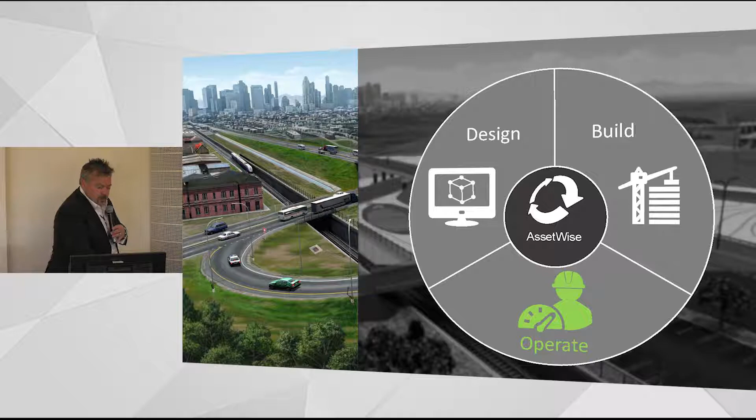Now, of course, there's not many brand new roads that go from nowhere to nowhere. They're always connected to an existing asset. So I'm going to start in an operational environment. You might have an existing database of your road network that you're managing in the CDE. And we have applications that allow you to manage change across that network, to improve the reliability of that network.

And as you saw, we've got analytics tools that allow you to look at the different performance characteristics. And in future, as we move further into a big data world, look at information from things like sensors built into the infrastructure to be able to make improved decisions.

What does that look like? Well, this is a linear reference model network of a set of roadways, and we are basically looking at a project where we're going to upgrade this road between two existing ones on our map there.

We can create the road within this network model. We can assign various bits of metadata to that road. We can say what it's called, what class of road it is, perhaps which direction it's moving in, the class and types of vehicles that might use it. But we can also use that to reference inspection records against.

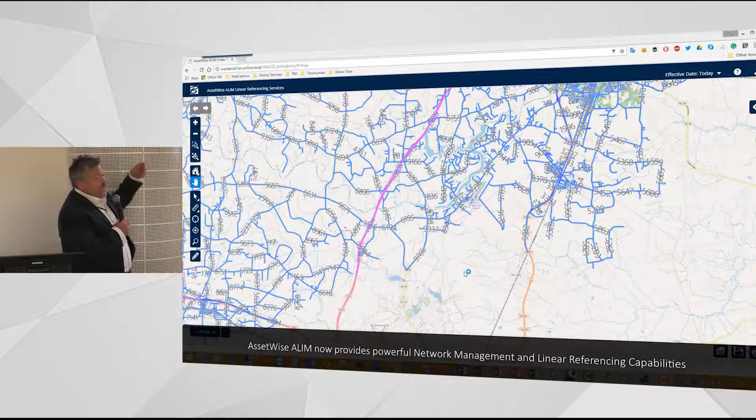And you can do things like change the different layers that you're looking at. You can measure it. You can interrogate that 3D model and look at it in relation to a set of maintenance plans, for example, within the AssetWise solution. So that's just context capture. And a reality mesh is a 3D model built from photographs.

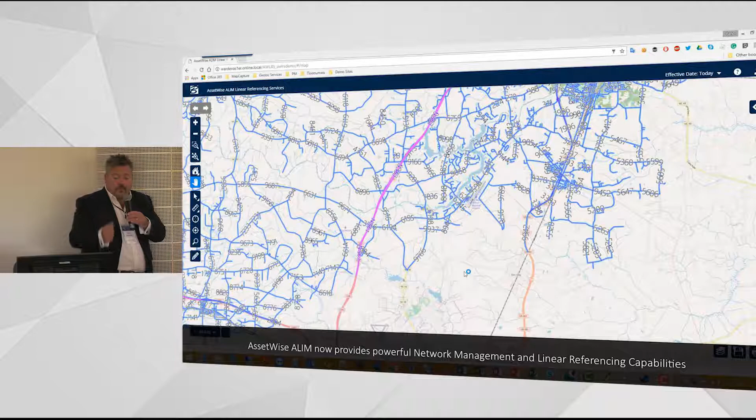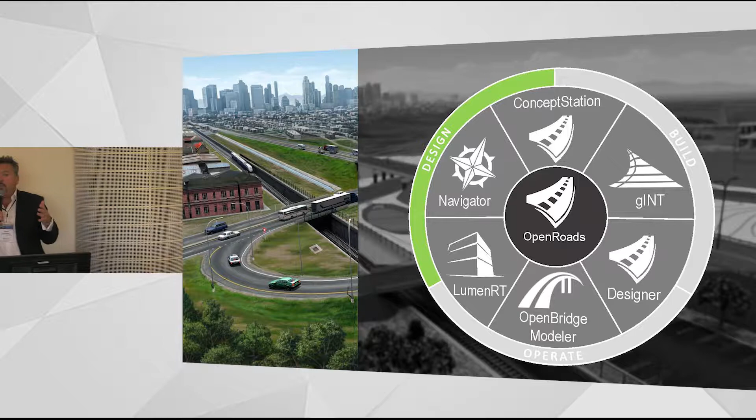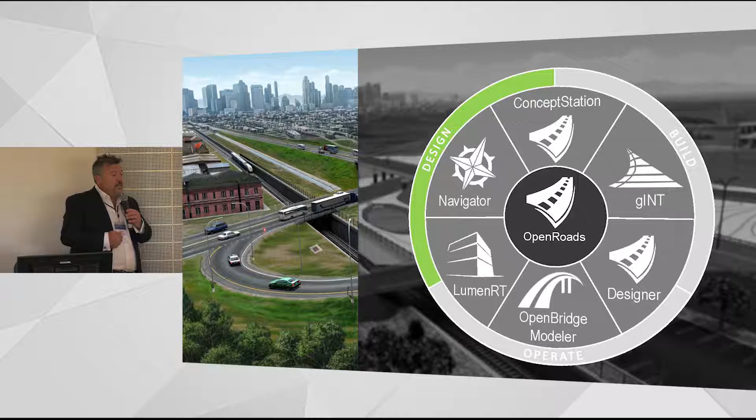I'm going to move into design now. Open Roads is a set of products ranging from conceptual design with Concept Station, to gINT which looks at geotechnical and subsurface information. Our most recent acquisitions, which Stefan mentioned, include Synchro, and we've just bought two companies called Soil Vision and Plaxis, which strengthen our subsurface engineering capability in support of the design work above the surface. Designer looks at detailed design of roadways and bridge modelling, and LumenRT handles visualization. I'll show you all of these in a little detail.

First we'll look at a reality model with the contextual information of the scheme we're working on. Here you can navigate throughout that model in Concept Station, and actually extract the part of the model you want to work with. You may have flown a 15-kilometre square area of land, but the corridor you're interested in is much shorter and smaller, so you can extract that and use it as the basis of your design work very easily.

When working at a conceptual stage, you want to sketch out different designs and ideas, and Concept Station allows you to do that. You'll see the ability to create new roadways, maybe link existing roads to your design. In this case, we're changing an earthworks section along that roadway into a bridge, shown in both 2D and 3D. By striking the line across and rotating the view, you can see we've created a bridge there, and that information carries onward into the detailed design phase, so all the work done at that conceptual stage isn't wasted—it's time well spent and can be reused.

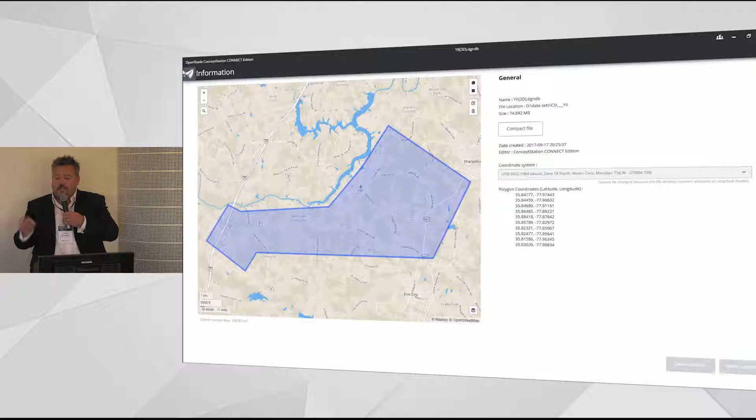I mentioned the ability to link roads, but we can also quickly and dynamically design things like roundabouts inside Concept Station. I'm hoping to give you a feel for how interactive and dynamic Concept Station is, and how it speeds up the process. At any point you can click a button to understand the financial implications of the decisions you're making, and get costings and quantities from the project. I'll show you more of that when we get to rail.

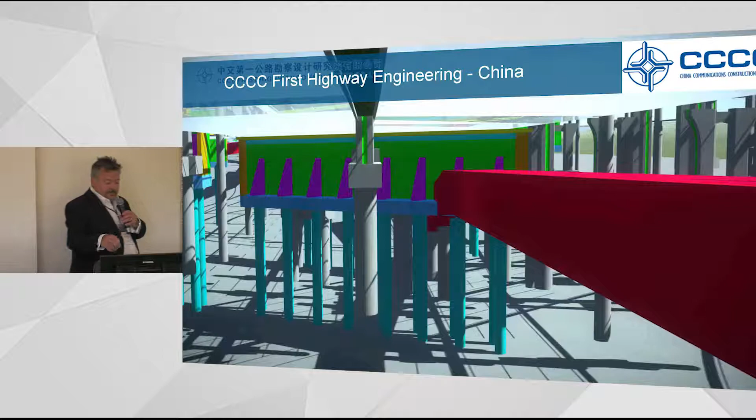Moving to China, this is an organization called CCCC First Highway. They had a huge project in one of the southern provinces of China, with a lot of subsurface engineering to model—over 3,500 underground utilities, 8 major interchanges—and just 9 months to do it. They used Concept Station to achieve that. I wanted to show this video because it demonstrates our subsurface clash detection capability. In red, you saw a duct running and interacting with, or breaking through, the underground infrastructure, and they were able to use Navigator to resolve those clashes at the design stage instead of out on site, reducing rework and optimizing both the information and quality of the product they're delivering.

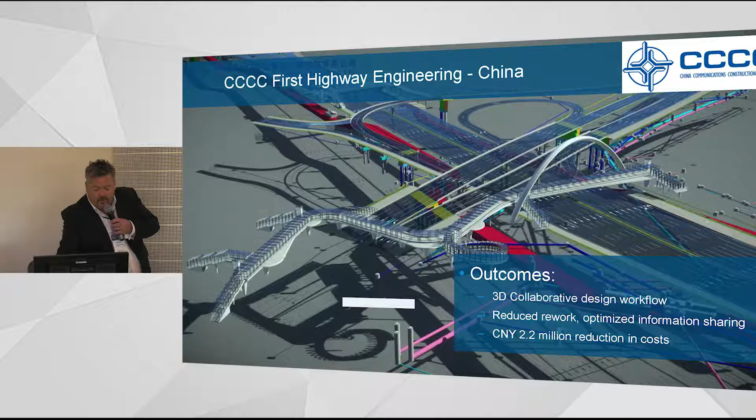Let's move into visualization. I mentioned LumenRT, which came from the movie business and has been involved in Hollywood movies over the last few years, including Avatar. But it puts this in an engineering context, allowing you to take your conceptual design models and create really lifelike visualizations and simulations—including the ability to link to products like Vissim, bringing real traffic models into your road environment, and onward into VR, whether using Google Cardboard or higher-end, higher-quality headsets like Oculus Rift and other quality brands of VR headgear available.

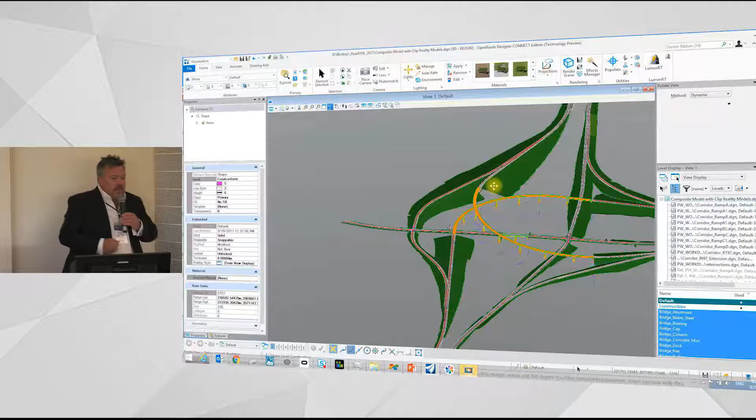And there you see working in a VR environment, jumping and transporting, as they call it, to different parts of that model or simulation.

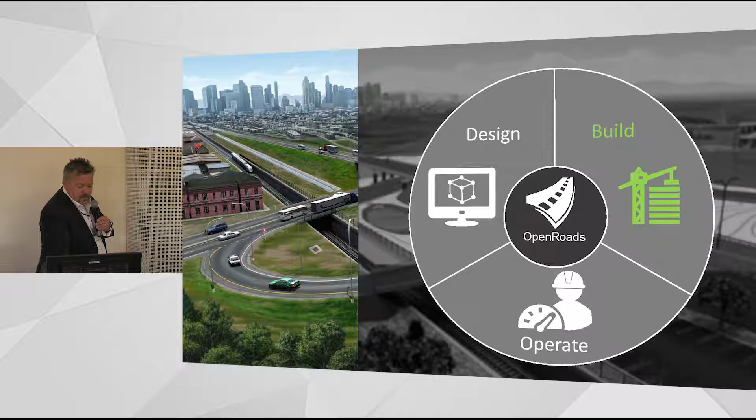I'm going to skip through this video and move onwards into construction, because all of that information can then be taken from design through detail into construction, and we can look at automating that process.

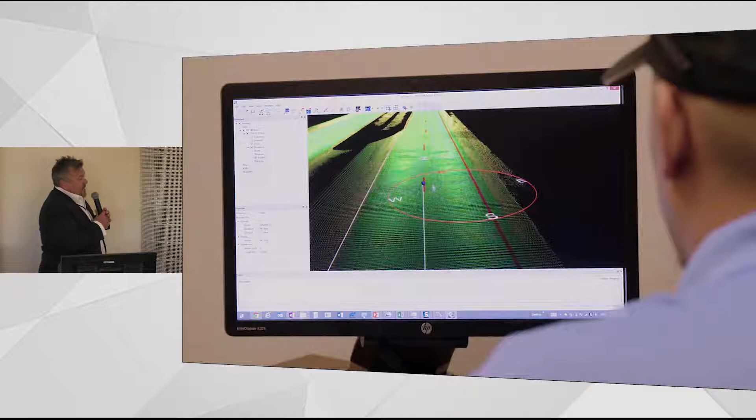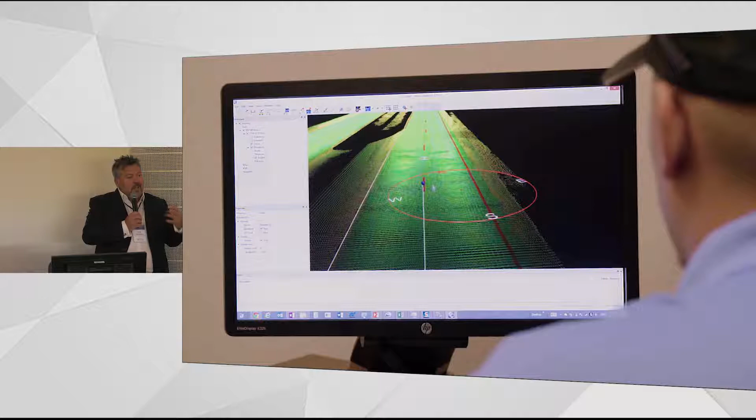We're working with Topcon to optimize that for those working within the industry. You heard Stefan use the word constructioneering. What that really means is we can take that 3D model and digitize that workflow so that we're handing it to the machinery, and it's using it not just for grading and earthworks, but also, as you see here on screen, actually laying the asphalt for the road. It's controlling the level of the blades left and right to ensure the right quantities of material are laid as per the design, optimizing the cost of the material you're using.

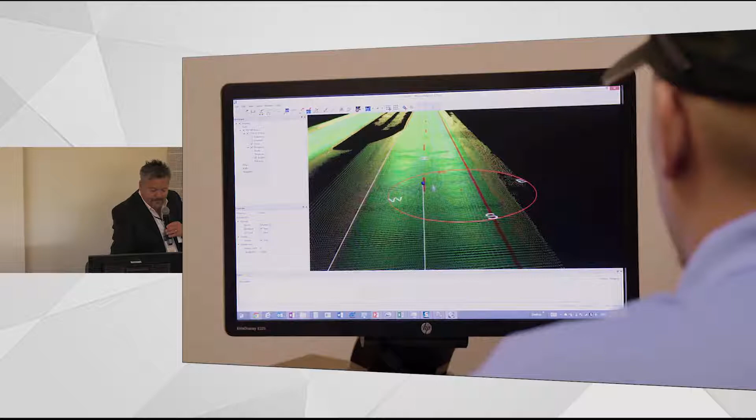And of course you can then survey that road as you go and compare the as-built directly to the as-designed, and see where the discrepancies are and whether they're acceptable. So just another way that we're digitizing those workflows.

Once it's built, the longest part of your asset's life begins - the operational life of your asset begins. And that should never be forgotten.

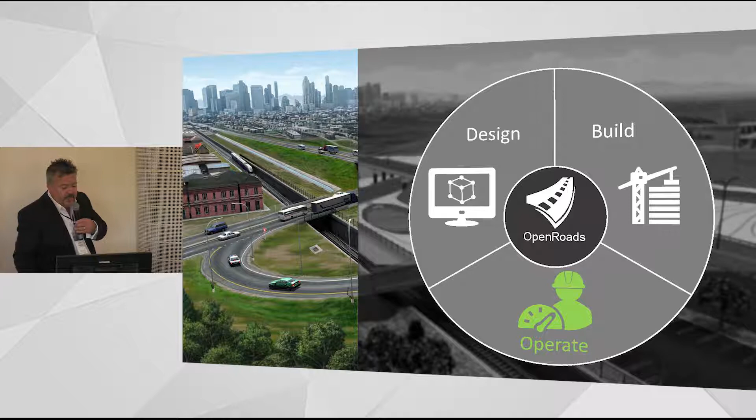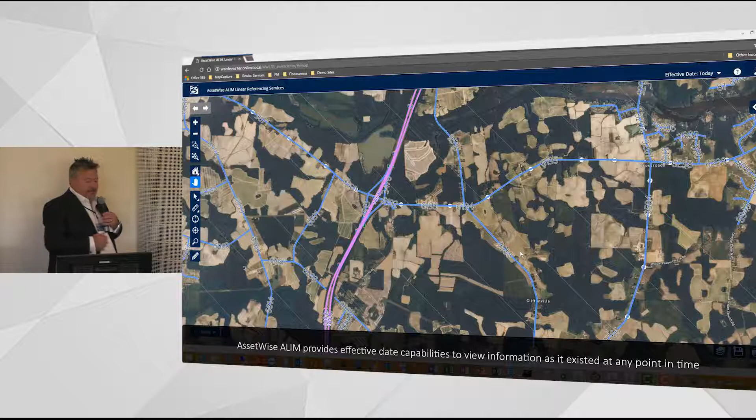But what I wanted to do was go back to where we started and look at how your new design can then be incorporated and go full circle back into your operational database, into your connected data environment for this road network.

At this point in time, we're going to bring that new design and make it the current model. You can see that we can update the network model for that particular piece of infrastructure - that intersection right there in the middle of the screen.

So OpenRoads and AssetWise leverage information that sits within your connected data environment, using those components, context, and workflows that I spoke of. What does that enable you to do?

Well, actually, it allows you to link every one of the disciplines, all of the data they're using, and all of the different applications - be they Bentley applications, or as we saw on screen, other applications that might exist throughout your organization or the project. Bring those together to streamline project delivery, enable digital construction, and increase asset performance at the end of the day - drive more value out of the assets you're designing, building, and operating.

And I mentioned OpenRoads and AssetWise are the two brands and sets of products used in that operational environment.

So I think I'll take questions on both road and rail at the end, but in order to keep to my time schedule, I'm going to move straight on into rail and give you a similar presentation. And then if you've got some really hard questions, Stefan is still here to answer those, or I'll give them a go myself.

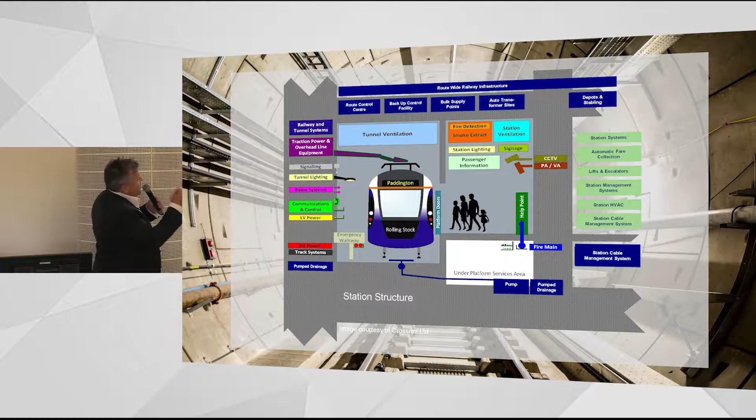And in fact, if you just take this slice through - this is a station of Crossrail, a new rail link being built across, or under in fact, London presently - you can see the number of different types of engineers and disciplines involved, not only in designing and building that asset, but when it becomes operational, maintaining that asset safely and reliably, whilst you've got members of the public roaming all over your railway station, or through your buildings, or across your roadways.

Hugely complex, and when you're working in a tunnel like this, in a very tight and confined area.

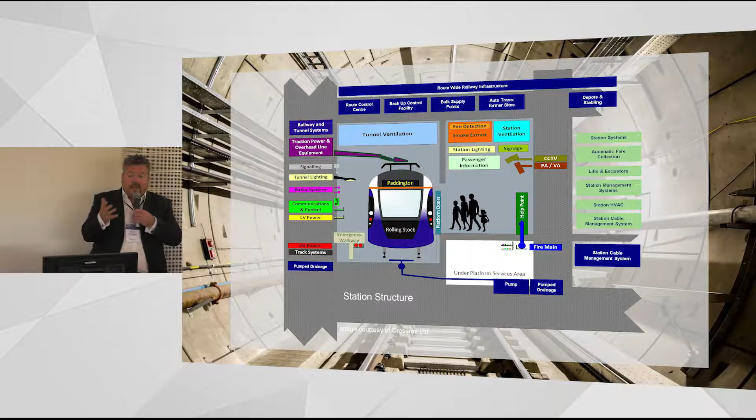Now, of course, railways aren't the only complex industry in the world. If you think about space, aerospace, or defence, or some areas of manufacturing - these are very complex industries with lots of different moving parts and different suppliers within the chain that is creating that.

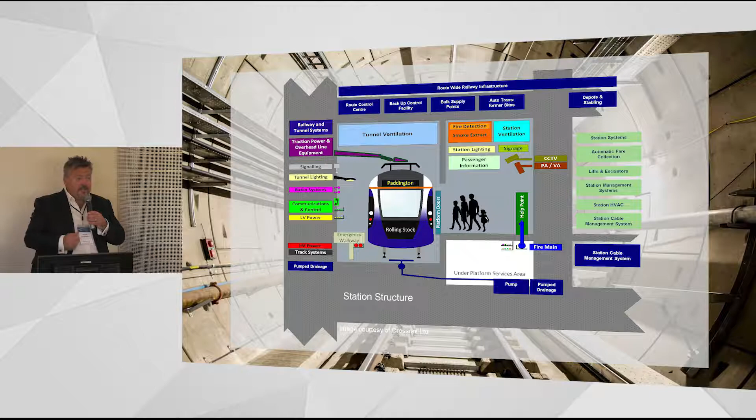And what they use, and what Mark will talk about in more detail, is an approach called systems engineering. And at the heart of systems engineering is what we call a V diagram.

I mentioned at the start, I'm a simple man. To me, what this means is that what you conceived at the start, systems engineering is a way of ensuring that that's what you get at the end. What you designed, what you've built, always follows those requirements that were set right at the outset.

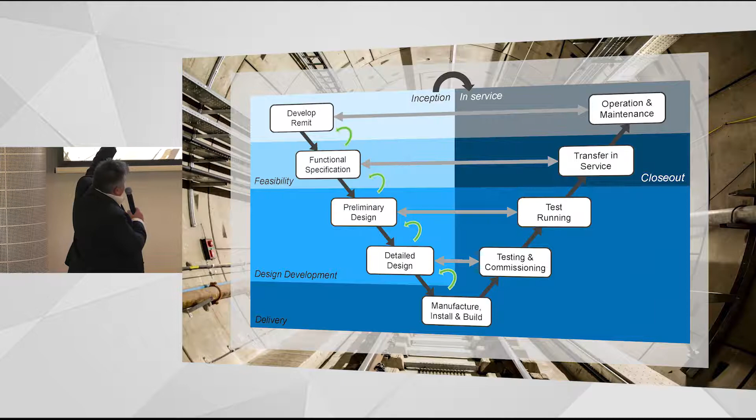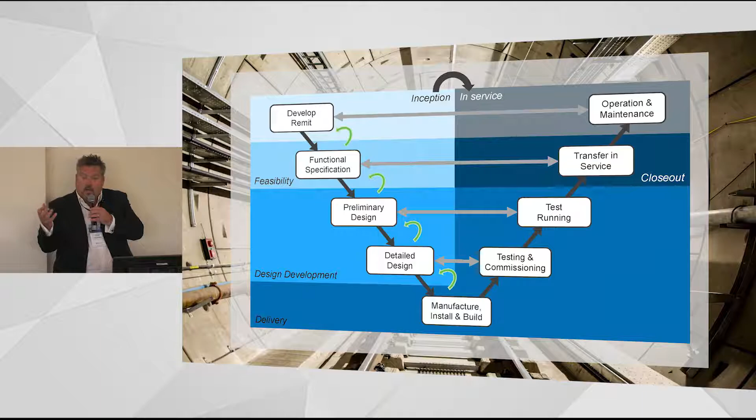So as we move down through requirements capture, through specification, and into preliminary design and detailed design, there's lots of checks and balances in place to ensure that you're meeting all of the different standards that are involved. Then we go through building it, and then testing the systems and subsystems in a railway particularly, check that they first work and they work together, and then making sure that information is handed over in a safe and reliable format to the operator that will continue to run that asset whilst it's in service.

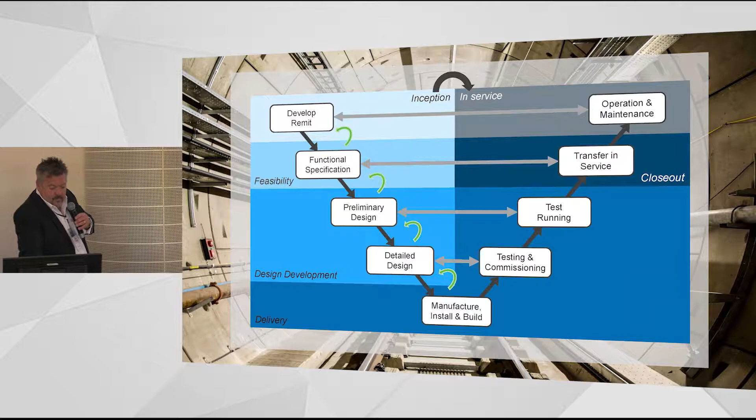And systems engineering is the way that we will go through, if you like, our rail solution, which is called Open Rail. So I'm going to leave that V diagram at the top there, almost like a map for the journey that we're going to take through rail.

Again, it relies on that CDE. This time it's an Open Rail CDE. And that compliance and assurance layer, the systems engineering approach, using a product called ComplyPro, which Mark will cover in more detail after my presentation, is the way that we manage that. And that sits outside your CDE, but uses all the value and the knowledge and the information that sits in there to be able to ensure that you're delivering it as required.

Open Rail connects all of the different people involved, all of their data and the disciplines, be they track designers or civil engineers or structural engineers, all of the information and the applications that they use. And I'm going to start in an operational environment again.

Using Open Rail operational analytics, we can look at data in a different way and make decisions on that data to help our design project of the future.

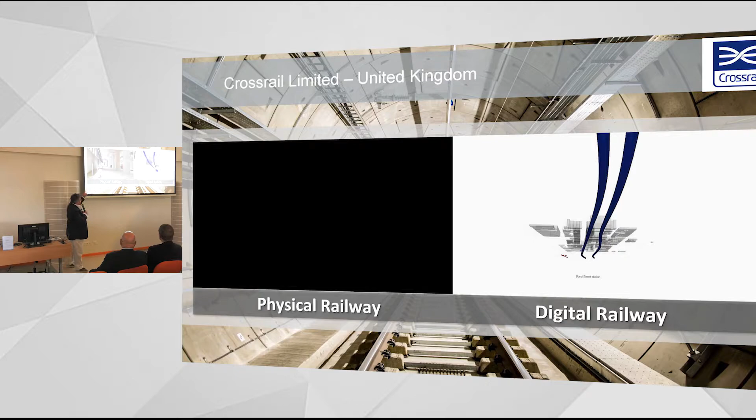Crossrail talk about delivering two railways: a physical railway that will run into the future, but also a digital version of that railway. Here's an example I came up with, where we've got the design model visualized inside MicroStation and driven using Navigator. On the left-hand side, you can see a video that Crossrail themselves created, flying a drone down the infrastructure as it's being constructed. Each of them is kept in sync through a connected data environment that back in 2016...

Up to 2016 it was running on-premise, but then they moved into the cloud using the Azure platform. That's been running there ever since without any downtime, providing them with the information they need to design and construct. Ultimately, that information will be handed over to a company called Rail for London, who have the license to operate that infrastructure into the future.

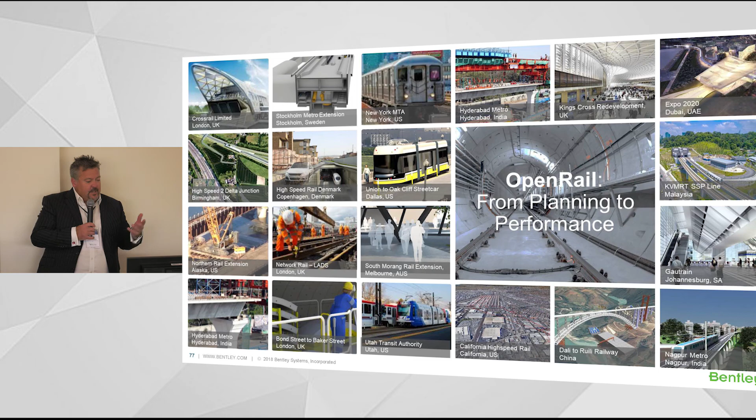But this is just a picture of some of the rail projects we've been involved in around the world. Let's go back to that. From the US to Crossrail in the UK, to projects throughout Europe, through the Middle East, onwards into Asia and China with bridges and new metros. It's about delivering different outcomes. Thank you.